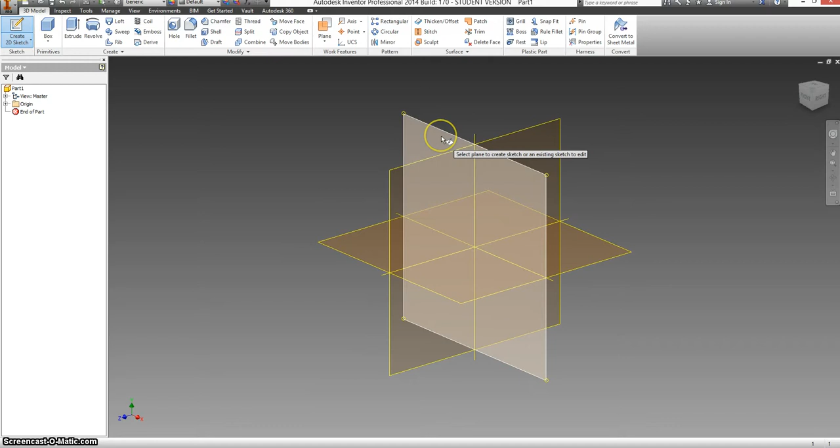Select rectangle. So first we're going to make a 2x4. Click on dimension, select your line. A 2x4 is actually 3.5 inches wide.

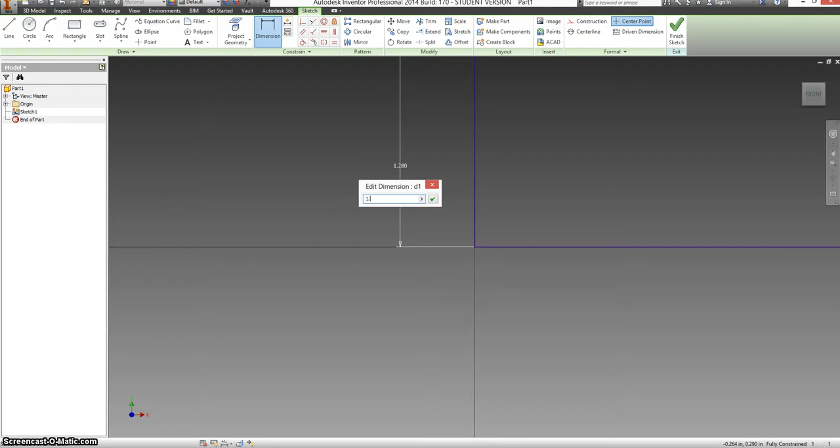Select a new line, click outside of it. It is 1.5 inches tall, and we talked about that because it is S4S lumber. They actually take off a 1/4 inch from each side. A 1/4 and a 1/4 makes a half, so instead of 2 inches it's 1.5. Instead of 4 inches it's 3.5. Okay, finish your sketch.

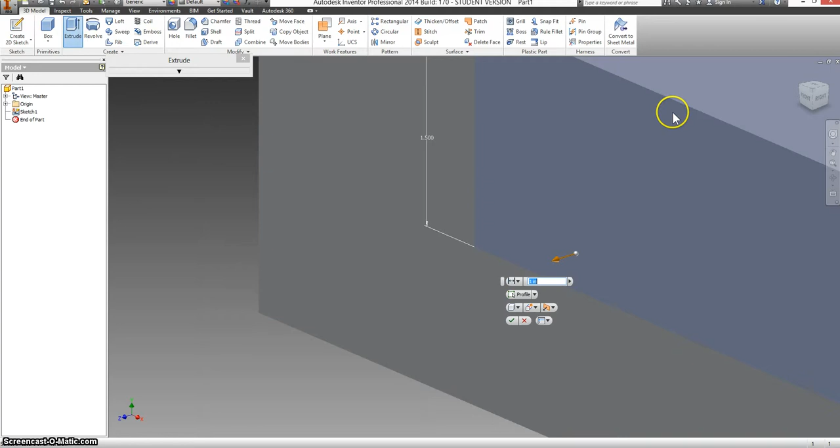Select extrude. Extrude is going to give it some depth. Let's click on the house symbol so we can see what's going on. And we are going to, sorry, I should show that - there's a little down arrow here. Make sure you check that. You'll get more options. We're going to make this 10 inches long.

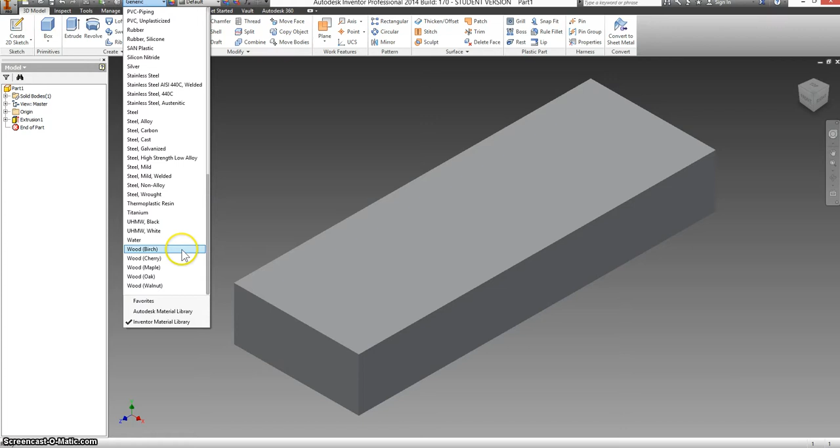Click on your house button again. And now here's our block of 2x4. To make it look a little better, we're going to change this from generic and scroll all the way down our list. We'll make it cherry. It's the closest we can get to pine right now. Okay, so now it looks more like a block of wood, and now we're going to start manipulating it.

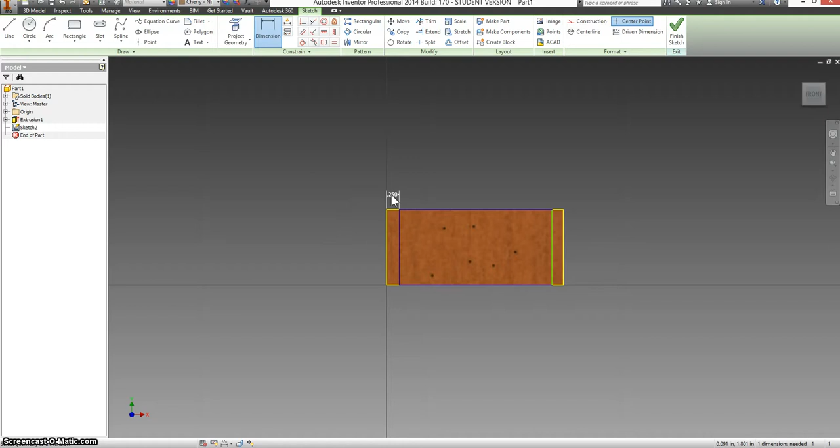So let's make a new sketch on here, and let's choose rectangle again. So we're going to start to remove the left and the right side from this object. So I drew a rectangle right in the middle of it, and we're going to remove the material that's on either side. We want these to be 0.125 thick, 1/8 of an inch, but the saw has a thickness to it. The saw is also about 1/8 inch thick. So 2/8 is 1/4, and that is 0.25.

So we are going to dimension this to be a 1/4 inch from each side. Finish your sketch. And this time with extrude, we can choose cut. This is going to represent cutting off the left and right side of your project.

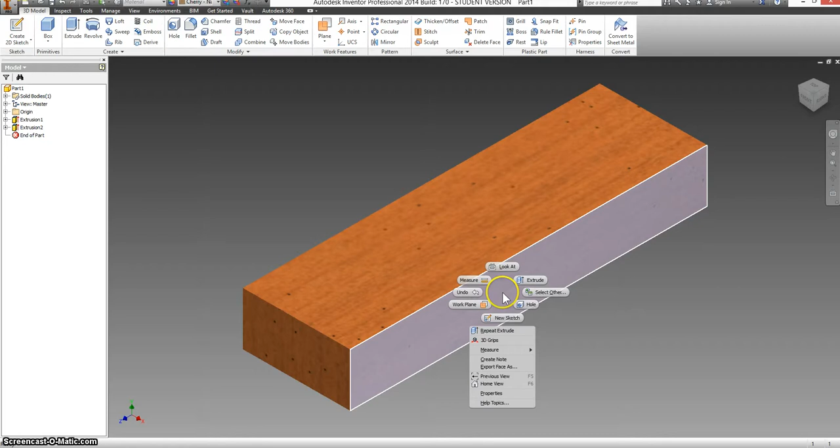Okay, now we're going to come in, right click on this side, make a new sketch. And we're going to use rectangle again, and draw just a few rectangles in here. This is going to be to lay out what we need to cut off from the project. So first off, we're going to lay these out to be 1/4 of an inch from the top and 1/4 of an inch from the bottom.

We want these to be 0.25 and 0.625. And the same thing on this side. Make sure this is 0.25.

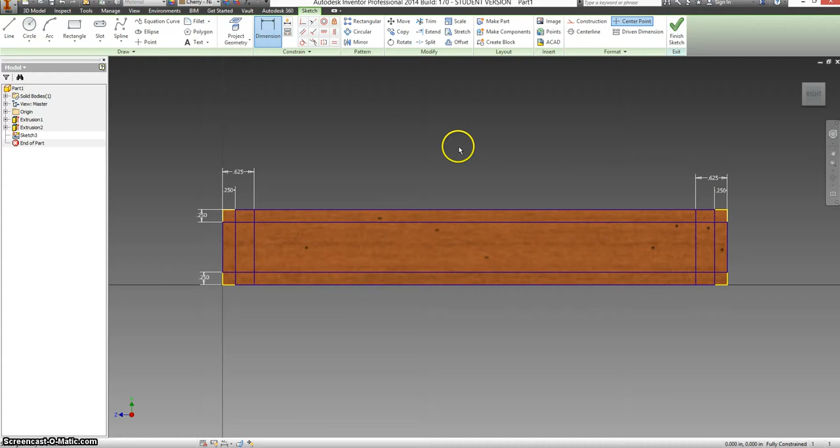And from this line to this line is 0.625. Okay, now I'm going to select all of these things that I just created. If it'll let me, you may have to hit escape first. Click and drag a green box around the things.

We're going to select construction line. And this is letting the program know that these are not actual lines. These are like if you had the physical block of wood, you're drawing on it with pencil. Say these are guidelines for what I'm about to do. Okay, that being said, let's select arc.

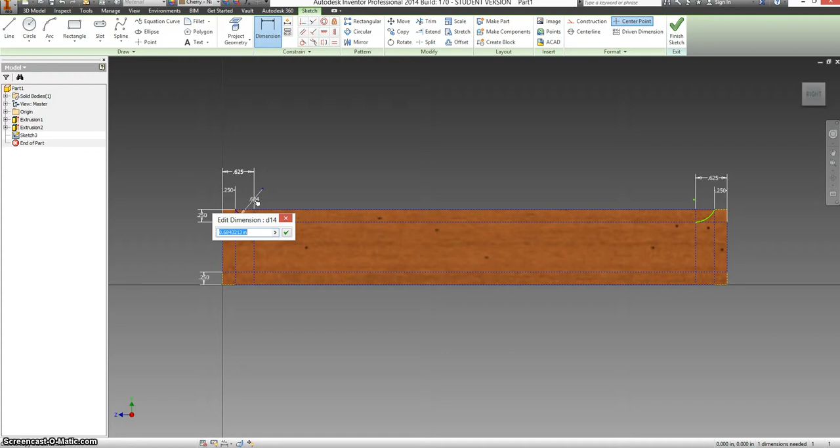And we're going to make a small arc here and a small arc here. Now the students in class will not be able to measure how much of an arc they are making, but because we're using a computer, we can. We're going to dimension this to be 1 inch in diameter, or actually it's a 1 inch radius. From the center out to a point is radius, from one side of the circle to the other side is the circle's diameter.

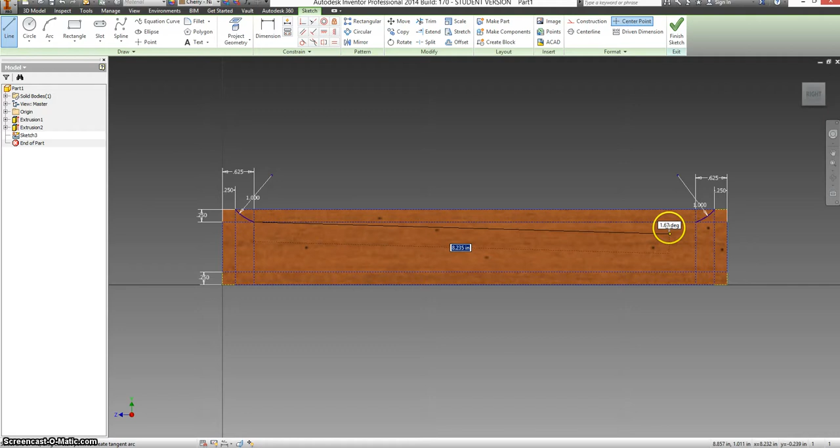Set those both to 1 inch, and we are going to be cutting out this top part first. This is the lid of the box. Alright, and we're also going to go ahead and sketch, so right click, make a new sketch. On the top of this, something similar. We're going to select line and construction.

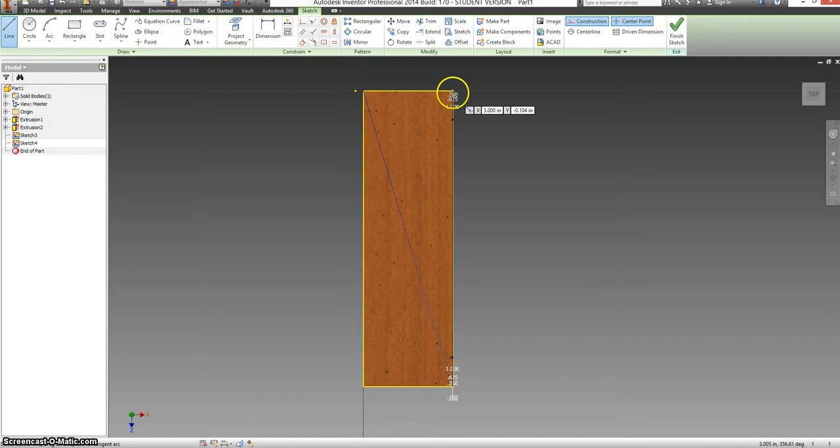We're going to draw, as if with pencil, across the top here from corner to corner, and here from corner to corner. Anytime you have a four-sided shape, if you make an X on it from corner to corner, use some kind of a straight edge or a ruler or anything that's going to give you a straight line, that'll find the exact center of an object.

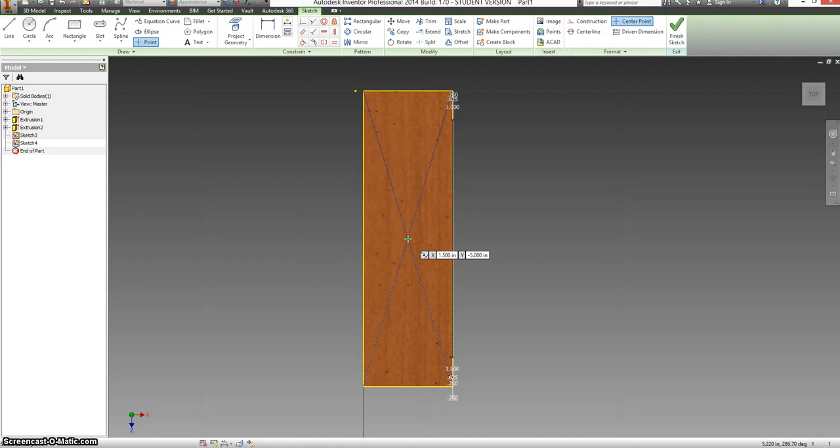So we're going to turn off construction, select point, and if we hover over the middle of that X, it'll give us a green dot. It's a snap point. We'll put a single point there. Finish your sketch, and we're going to select hole. And this symbolizes coming in with a drill and drilling into this piece of material.

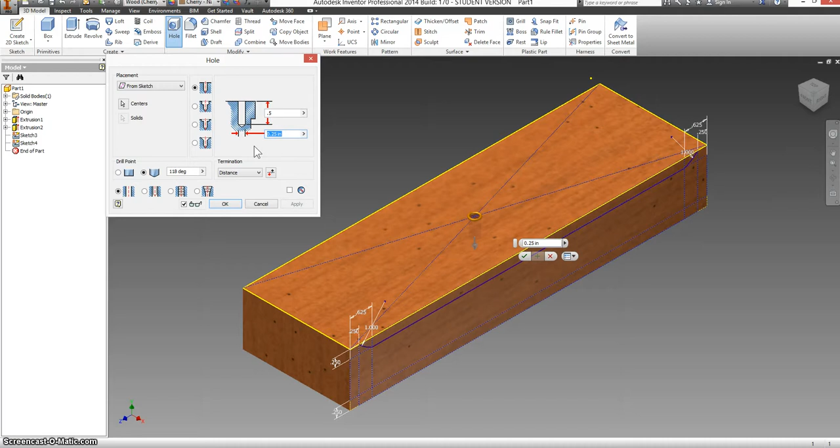We will make sure it's a distance, because we have the options of all the way through the object or to a certain depth. We're going to select distance. It's only going to go down a ½ inch, so 0.5. And we're going to make the diameter of that, see the lines that are showing the width of this hole, 0.625. And that's big enough that most people can fit their finger inside and lift the lid off of this.

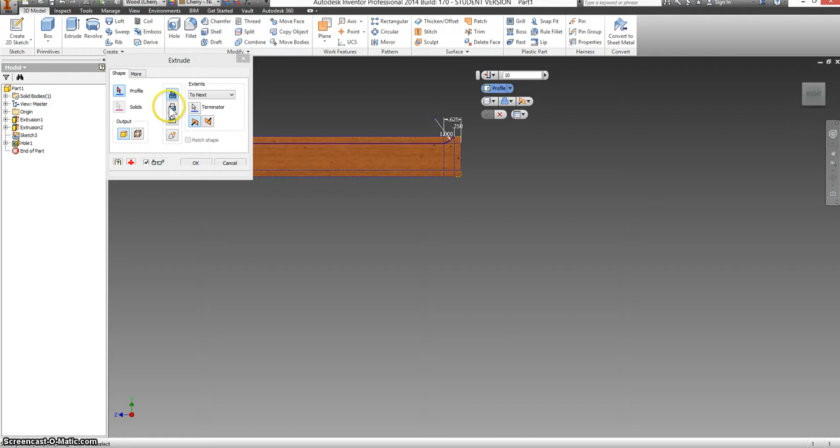Now I want you to notice, if I look at a right side view, that's extending down below where our lid is. So when we select extrude, we're going to be cutting out just the lid piece, which right now it doesn't want us to. We may have to go back and add an extra line up to the top part here.

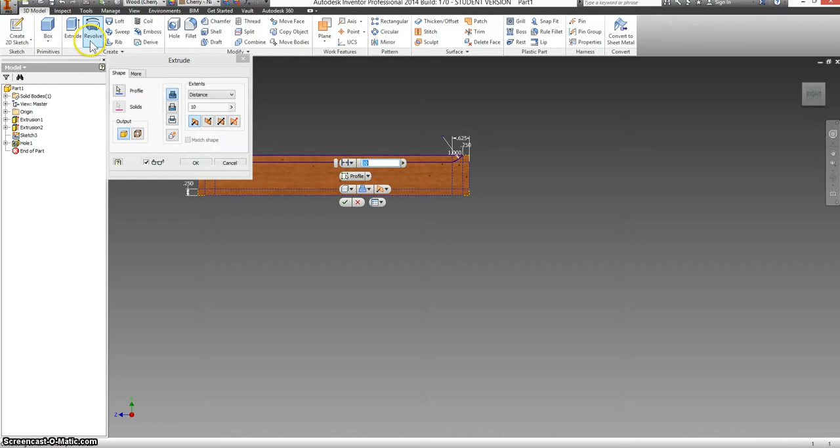So we're going to double click on sketch 3, select line, and go from point to point, and finish your sketch. We're going to extrude, cut, and now it will let us select the lid. And I'm going to click on the house so you can see what's happening. We're removing this whole piece of material. We don't need it to extrude out 10 inches. So I'm going to change this from distance to all, and it's just showing the lid removed.

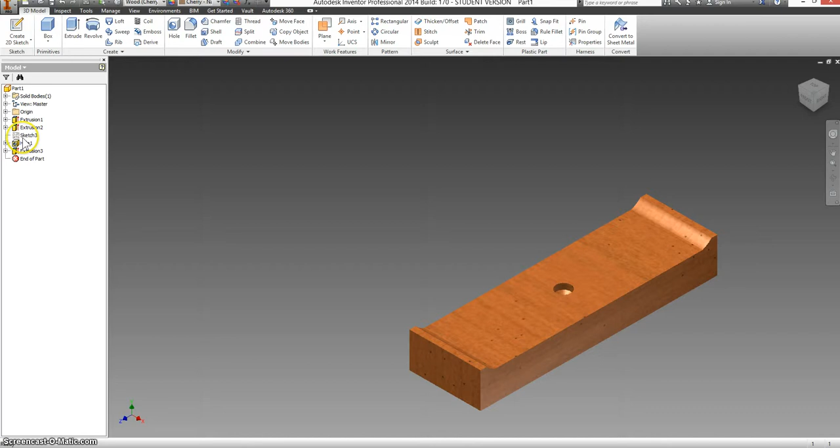Okay, so now we can't see it in this drawing because we're only going to draw one piece at a time, but we would now have a left and a right side piece and a lid piece that are all somewhere else, but we are only making the body in this video. So let's come back to our sketch 3. I want to still use this, so I'm going to check visibility. So you have to right click first, it gives you extra options, and select visibility.

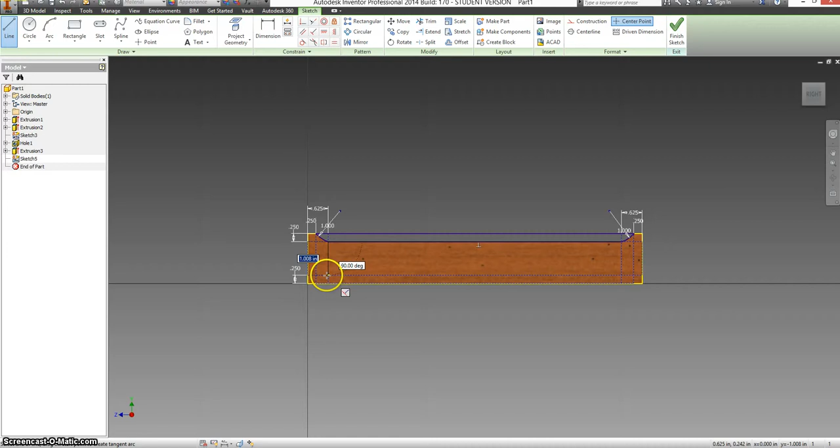We're going to make a new sketch, so I'm going to right click here, new sketch. I'm going to draw back in with lines to connect to my construction lines, my stencils that I had already laid out. Finish our sketch, and actually the other students in class are going to be coming in and they're going to be cutting out one piece first. Let's see if it'll let me do this.

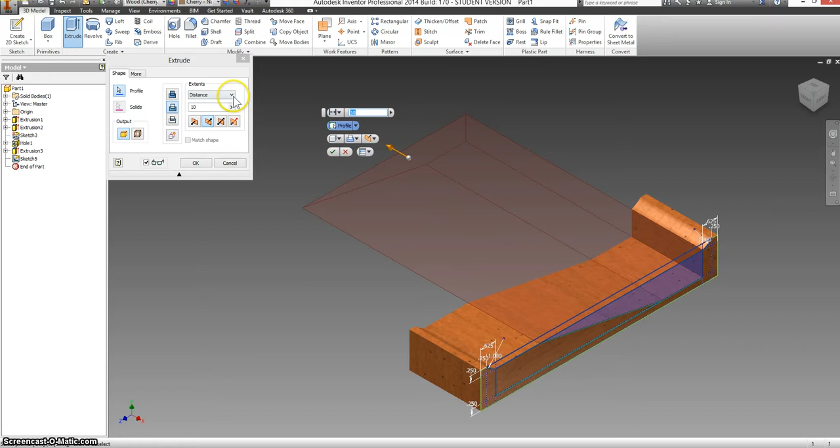We're going to extrude, cut. You take out one piece first, set your distance to all, and then they would go back and take out the other piece so that they're left with just this base piece here. We are now finished. I'm going to set it back to our home view. It brings everything into view. I'm going to right click and turn visibility off of this sketch, and we are going to save this as our pencil box base.